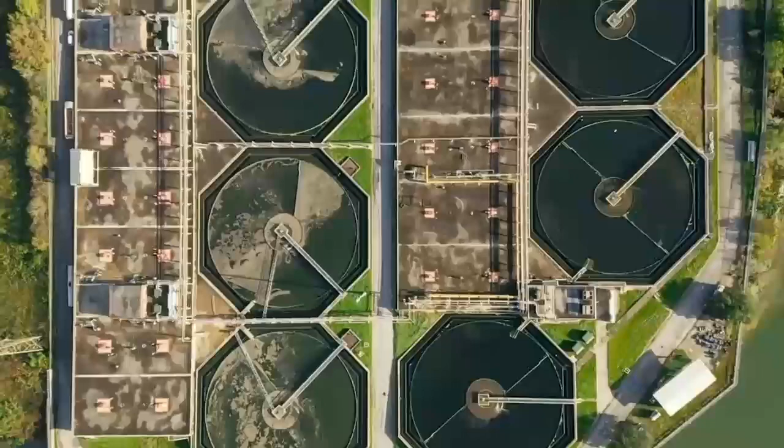You may not notice us, but we work around the clock to support you. We are the foundation for life in Houston.

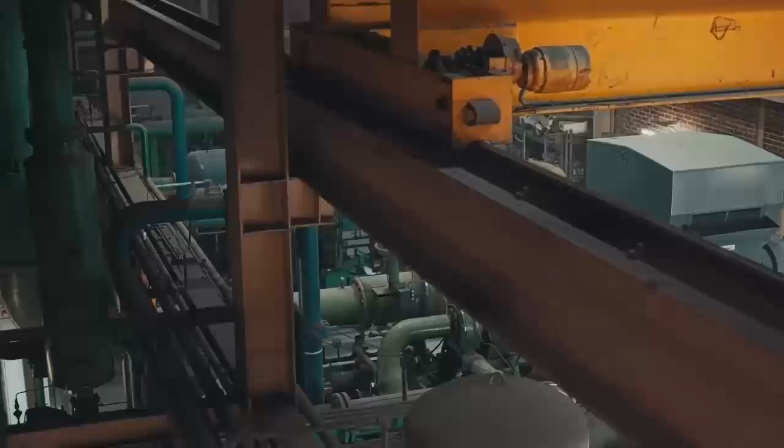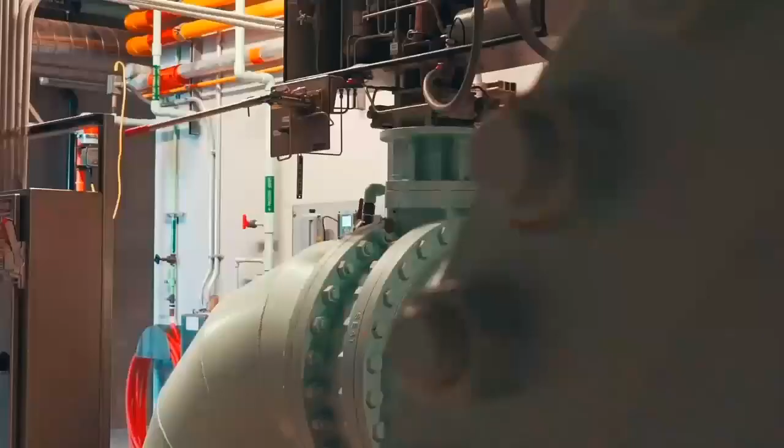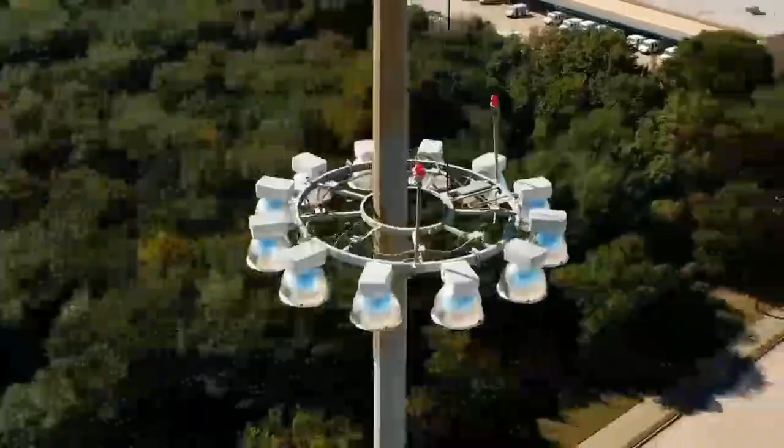Houston Water distributes enough fresh water to fill the Astrodome 4 times a day. Transportation and drainage operations handle 16,000 miles of streets, over 1 million signs and street names, and thousands of drains.

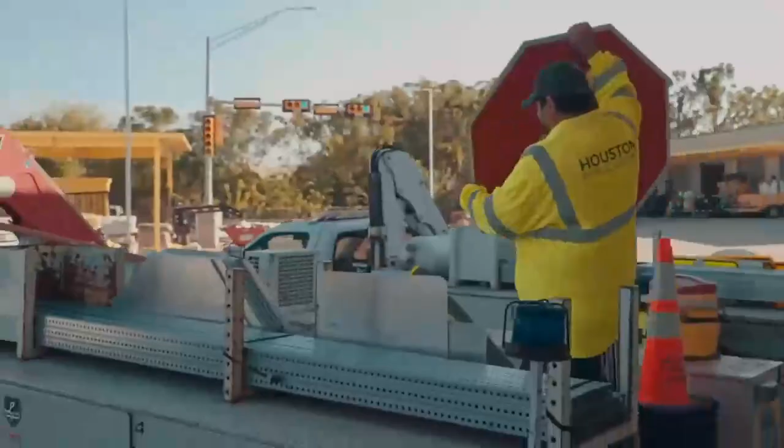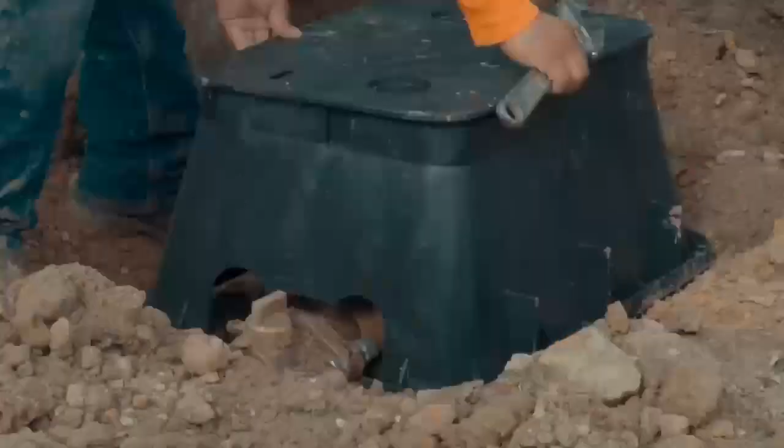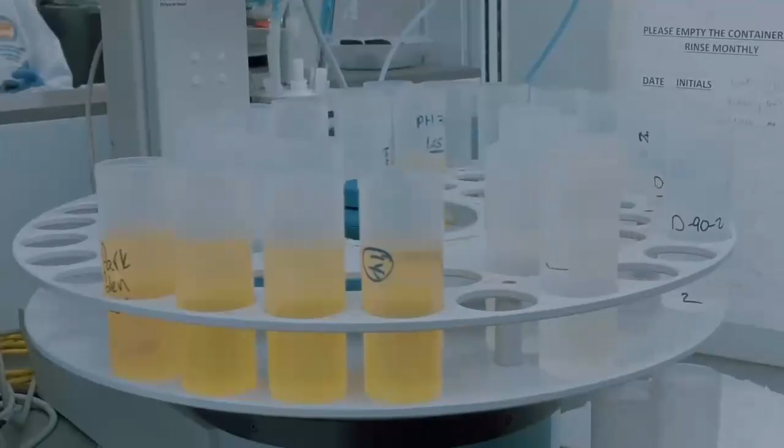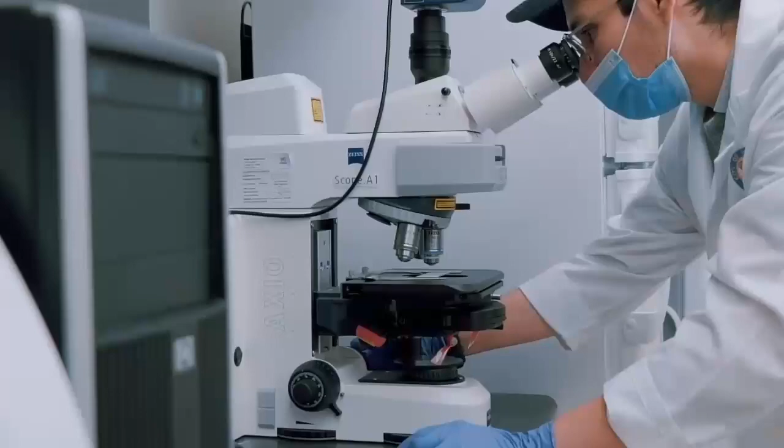The Houston Permitting Center regulates hundreds of projects so you can work, play, and live safely. Customer Account Services ensures 2.1 million people have access to safe drinking water with efficiency, accuracy, and flexibility. Capital Projects manages the critical improvements that make Houston better every single day.

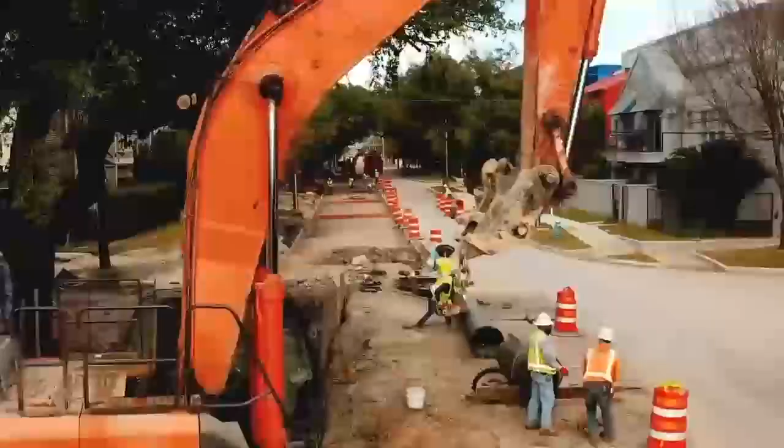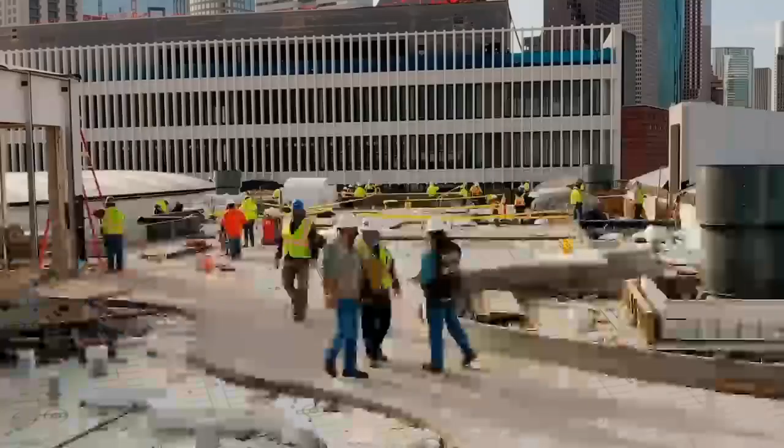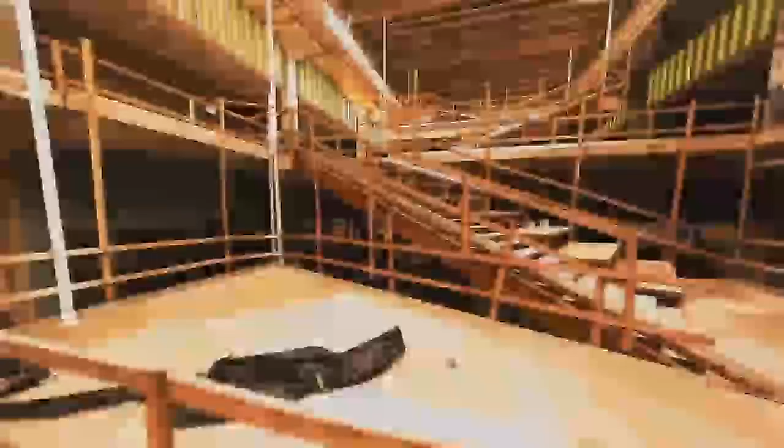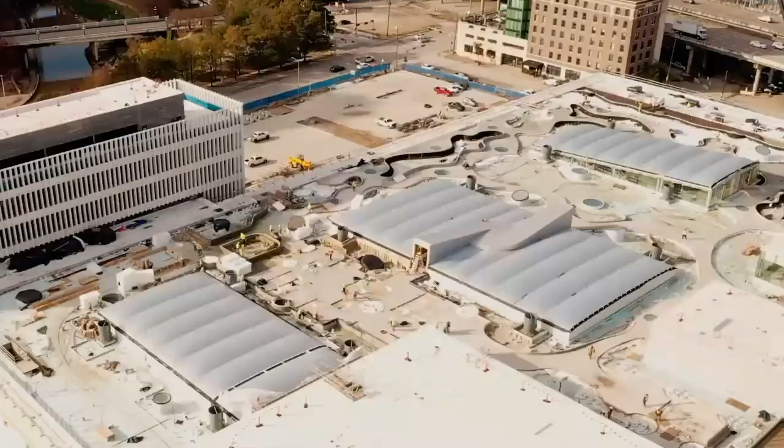Houston is always moving towards growth, innovation, and progress. We are the largest, most diverse public works organization in the country. We are one team with one purpose. Together, we create a strong foundation for Houston to thrive.

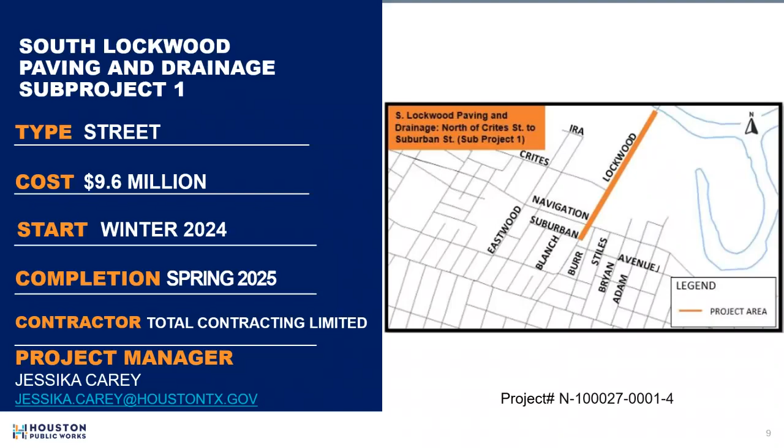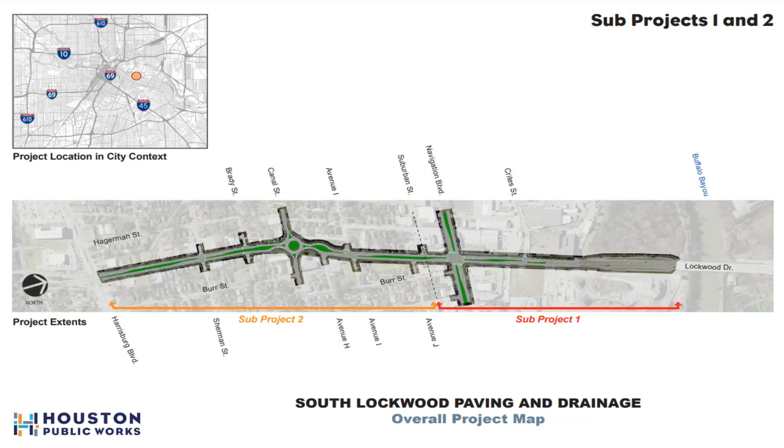Now, there are 2 subprojects to Lockwood. Illustrated here in red is Subproject 1, which we are discussing today. And once completed, we will host another community meeting to share Subproject 2 in orange with you. Here is a street view of the typical section that illustrates the shared use path and buffer with 4 lanes of traffic.

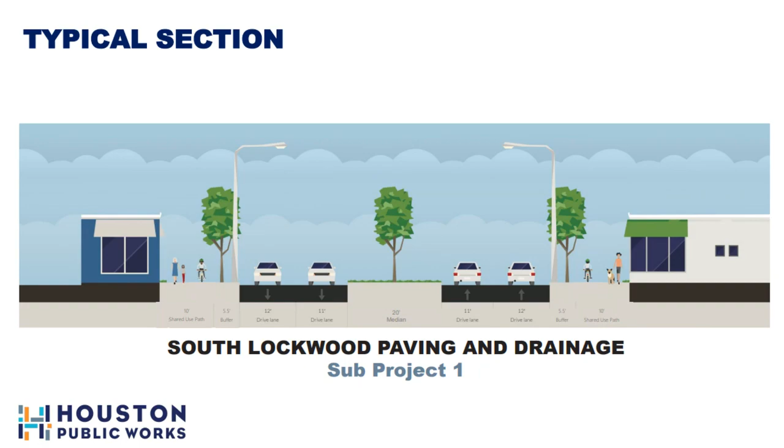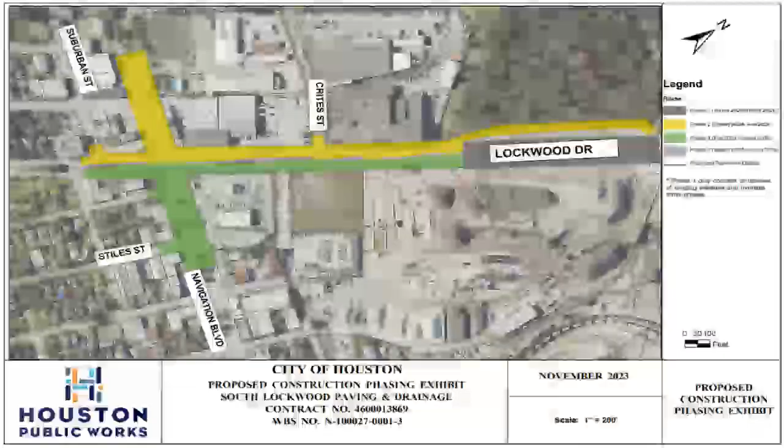So what do the seasons mean? Our construction timeline is as follows. Winter constitutes January, February, March. Spring is April, May, June. Summer is July, August, September. And fall is October, November, December. So for this project, we start in winter of 2024, and it is to be completed by spring of 2025.

What to anticipate during these construction phases? Our advice is to organize, don't agonize. So if you prepare for construction, the time it takes to complete the project will fly by. The first step to getting organized is to keep your door notification. The door notification contains pertinent contact information in case you have further questions or concerns. If your dog ate the door hanger, no worries. You can go to the project page online to view the contact information there at engagehouston.org.

If you have objects in the right-of-way, please remove them now as soon as possible. If you have specific landscaping that would like to be saved, we suggest that you relocate such plant materials now. Grass will be restored in areas upon completion of all construction. For most of the properties in the area, the City of Houston project right-of-way will extend about 2 feet back from curb. As a result of this and related capital improvement projects, the city and the contractors are granted full access into this right-of-way.

Please be aware and obey all construction signs and barriers. Safety is priority number one for everyone involved in this project. For your safety and ours, please pay attention to the following safety objects shown here.

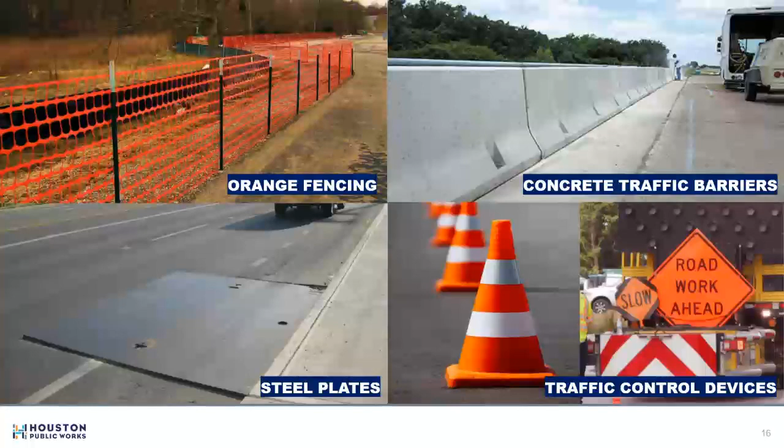Good news, there will not be any interruption to utility service as part of this project, as the contractor will be providing temporary service connections during construction. But please note that the contractor will provide notice at least 72 hours in advance if utilities are interrupted.

The tree protection plan identifies trees to be removed, which includes the removal of diseased or dying trees. The City of Houston identifies trees that can be preserved on a case-by-case basis.

Because the pavement along Lockwood and Navigation will be replaced, some lanes will be closed as part of the traffic control plan. At least one lane of traffic will be maintained in each direction at all times during construction. There will be 39 new streetlights installed as part of this project.

We encourage you to go to engagehouston.org to view additional project details and to take a closer look at the exhibits shared with you today. The project page includes additional exhibits, the traffic control plan, and the tree protection plan right at your fingertips.

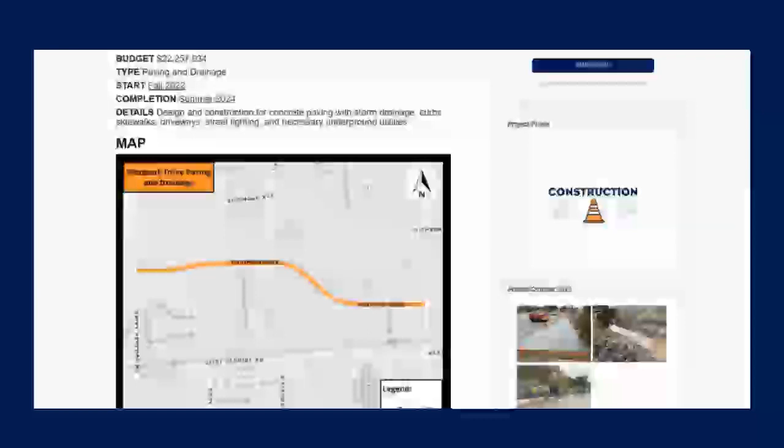Join community meetings with a click. Share important updates on social media or through private messages. Project pages let you discover detailed project information, interactive maps, FAQs, and useful widgets on each project page. Subscribe to specific projects for email notifications on updates, and access documents, recordings, videos, and team info.

Engage with us. For direct communication, use the Engage Us tool after registering. Ask questions and our team will respond promptly. Register now to unlock exclusive tools and features. It's easy: create a username, answer a few questions, and confirm your email. Get ready to maximize engagehouston.org. Welcome aboard, welcome to engagehouston.org.

Know the contractor. They are your first point of contact and the boots on the ground every day, capable of assisting you immediately. Remember that Total Contracting Limited's contact information will be on your door notification and on the project page, along with frequently asked questions posted on engagehouston.org.

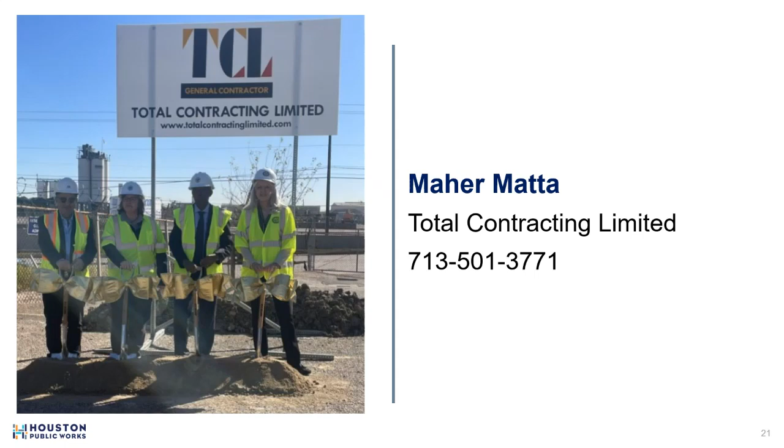We encourage you to call 311 if you have a concern. You can report online, by email, or yes, there's an app for that. It's not just for problems though. We always like to hear if our contractors are doing a great job, so please share that with us as well.